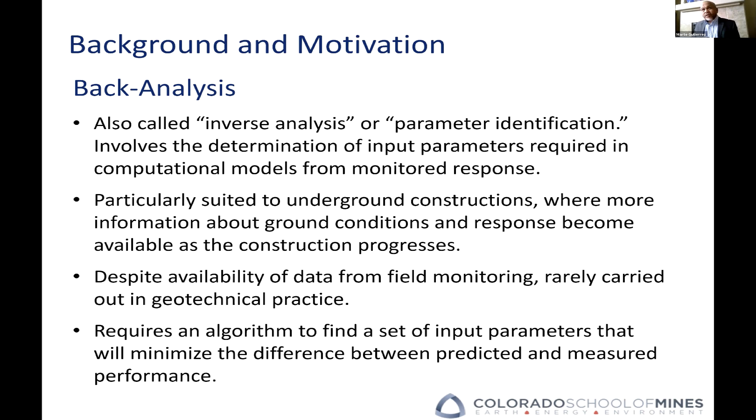Well, the challenge for back analysis is to develop an algorithm to find a set of input parameters that will minimize the difference between predicted and measured response. So we need to be able to match the numerical predictions, computational predictions with field performance by adjusting the input parameters.

Let me differentiate between forward and back analysis. In forward analysis, we have a set of input parameters. We do then our forward computational model, which is what we usually and typically do. And then using the computational model, we predict a response. And most of the time, that's it. We have a prediction, and we hope that it's the correct prediction. Most of the time, however, the predicted response does not correspond or does not agree with the field measurements. And that is where back analysis comes from.

In back analysis, we have the reverse, we have the observed response, and we have to develop an inverse computational model to try to determine what are the input parameters that will match the observed response. The most rigorous approach to do back analysis is by the so-called gradient methods. That is, we try to get the slope of the response at a certain time.

And we use the slope to move forward and to make an improvement on the predicted parameters. So if pk are the set of parameters, or the vectors of parameters, delta pk is the change within an iterative step to try to improve the prediction, and pk plus 1 is the improved set. We could do this by the so-called sensitivity matrix A, and we have to get the inverse of that.

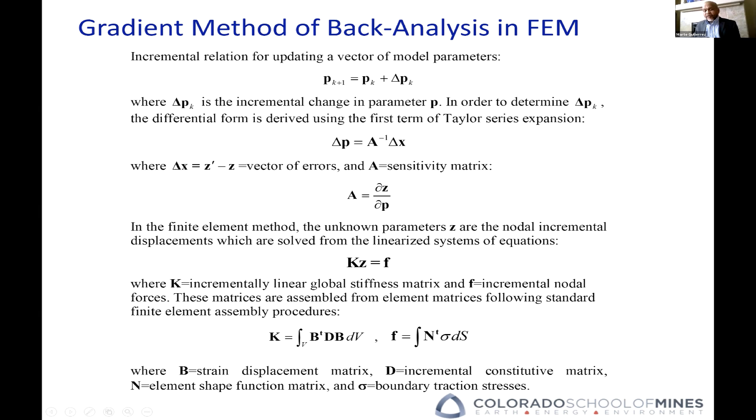The challenge is to find the so-called sensitivity matrix. A is defined as the inverse of K and the derivative of K with respect to p times z, which is our displacement vectors in this case. This is very difficult to derive most of the time to establish this sensitivity matrix. But even if we could, there are many issues with the so-called gradient methods.

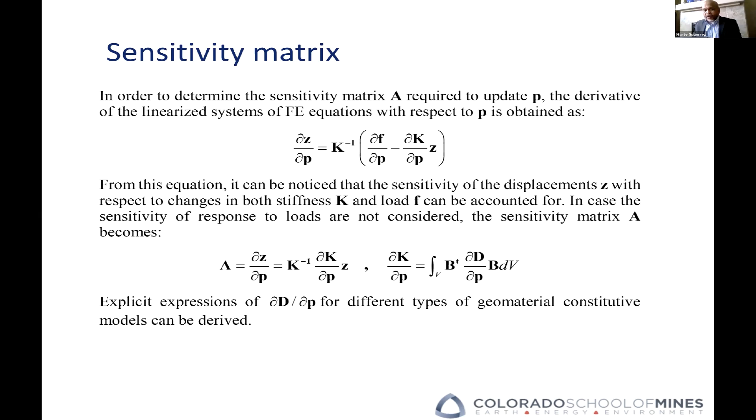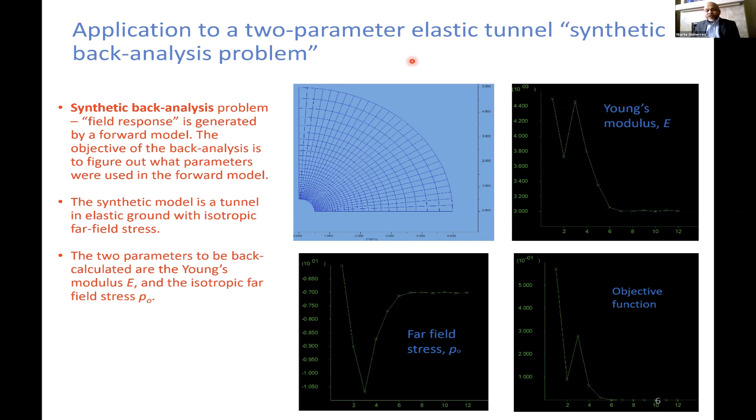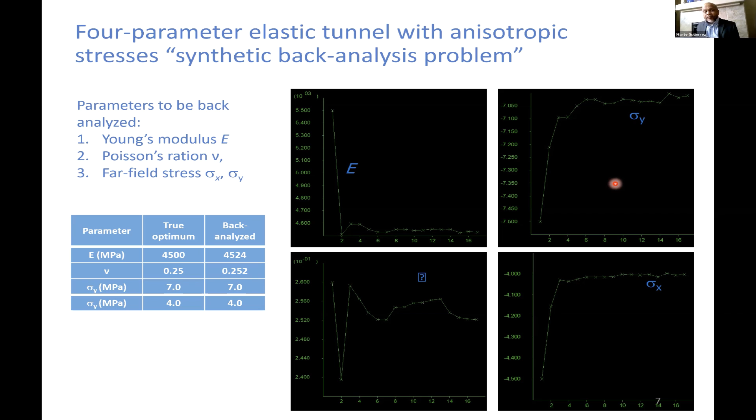The moment you have more than two parameters, in this case, we have 4 parameters: the Young's modulus, Poisson's ratio, and the far-field stresses, and we now have anisotropic stresses. You can see that the trend towards the final parameter is no longer simply monotonic. There's some cycles, it goes up and down. It really struggles to get to the true solution. And more or less, the only reason this method works is that we combine the gradient method with some search. We try to search for the parameter at the same time. So on paper, it's very good.

And when we were doing a study of this, we found out that almost all papers that use the gradient methods that you find in the literature only use as an example 2 parameters to back analyze and an elastic problem. And we found it to be odd. Why is it everybody's doing only two parameter elastic problems? It turns out that this only works for those cases. If you have nonlinear problems, it doesn't work. If you have more than two parameters, it barely is functioning. So in theory it is very good, but in practice, it doesn't work.

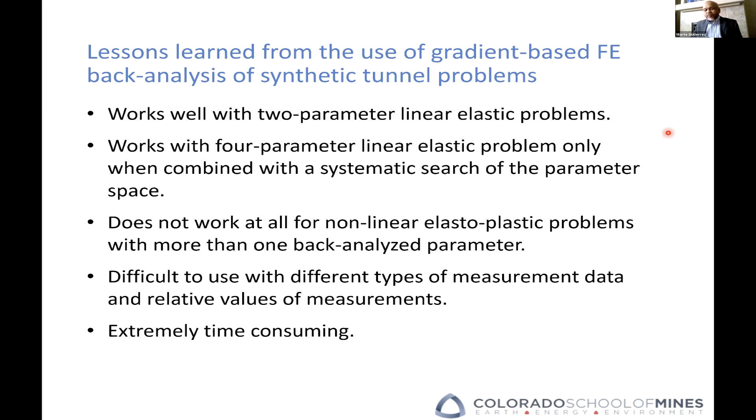So an alternative to so-called gradient methods is the so-called heuristic back analysis. This is nothing more than doing a search. You have vectors of the different parameters that are involved. You try to get the minimum and the maximum, and you discretize the space between the minimum and the maximum of the different parameters, and you try to do a search of which of those combinations of parameters will provide you with the best estimate. It's nothing more than a search procedure. You still solve the problem directly using a forward model. As in forward modeling, you just try different sets of parameters until finally you succeed.

How to carry out those searches is a challenge. And then here we could use the so-called heuristic methods. Heuristic methods are experience-based for problem solving, learning, and discovery. We do not guarantee the solution to be very rigorously optimal, but the set of parameters are good enough. It uses search trees, okay? So instead of generating possible solution paths, it looks at branches that are more likely to produce outcomes, and those are the ones that are selected. It's an iterative search.

It searches on the different parameters and it follows paths and avoids unnecessary paths by assessing how close the current iteration is to the solution. It's a viable technique for difficult optimization problems. This back analysis is really an optimization problem, or least square optimization problem, where you try to minimize the difference between prediction and measurements. And it exploits randomness in the system to try to get to the solution. Examples are neural networks, simulated annealing, genetic algorithms, and evolutionary algorithms.

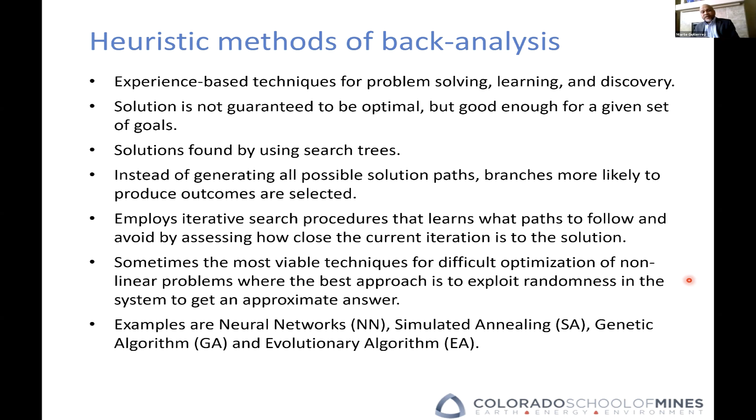Here we develop two methods. One is simulated annealing. I'm not going to give you the mathematical details, but the simulated annealing process follows a physical process, which is how we create a metal with very good properties. It simulates the annealing process of metals: how we come up with a very optimal atomic structure of a cooled steel, for example, or other metals.

So it uses a so-called cooling procedure until we arrive at a theoretically perfect crystalline structure in the material. It minimizes the number of imperfections and dislocations. And then during the cooling, it follows its own optimization path. So we have a program that uses the temperature. The temperature here is nothing more than a fictitious parameter to try to order the search and then allow the search to converge into the best solution.

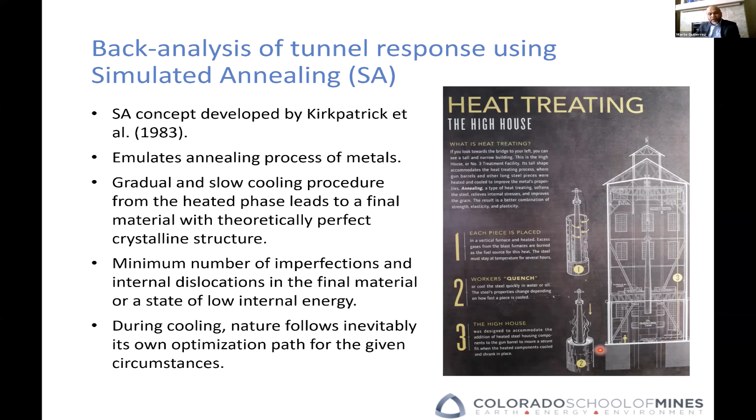This is a problem of a shallow tunnel. We only model half because it's symmetrical. And we have 4 parameters to back analyze: the modulus, ratio of horizontal to vertical stress, the cohesion, and the friction angle. And you see that after a certain number of steps, we arrive at the back calculated parameters that are very, very close to the ones that we used to generate the model.

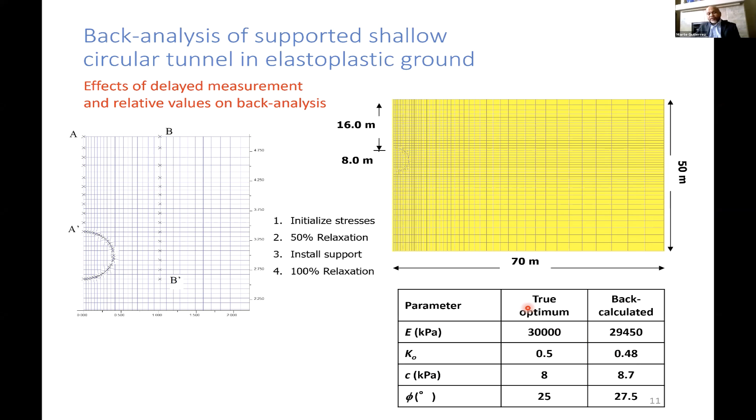And here is how it behaves. These are the 4 parameters that are being searched. As you can see, the elastic modulus tends to oscillate around the true solution, friction angle as well. But this is not how we judge whether the parameter converges. Although the parameters tend to converge between the maximum and the minimum, what determines the convergence is the criterion, the error function, the objective function that we use, and you can see how the objective function, despite all the oscillations, tries to converge to 0 and achieve an optimum.

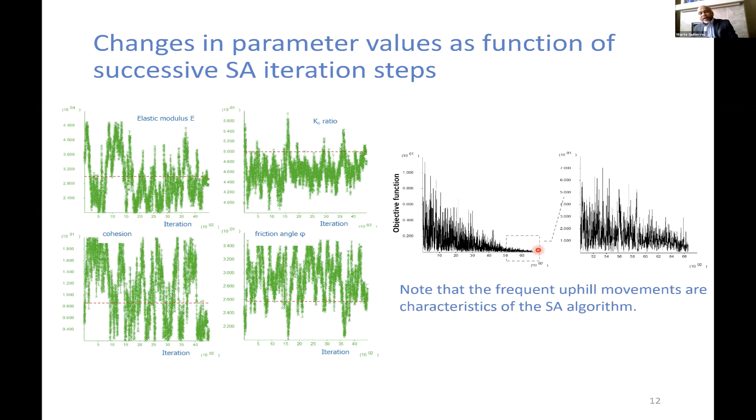The other back analysis procedure that we use is the differential evolution algorithm. This is based on the theory of survival of the fittest that we have in the theory of evolution. The fittest vectors, those that optimize the functions, lend their genes to the offspring. The differential evolution algorithm bypasses the requirement of a binary system in the genetic algorithm and makes it more user-friendly, because the genetic algorithm used to be only for binary systems. Like simulated annealing, these are direct search methods.

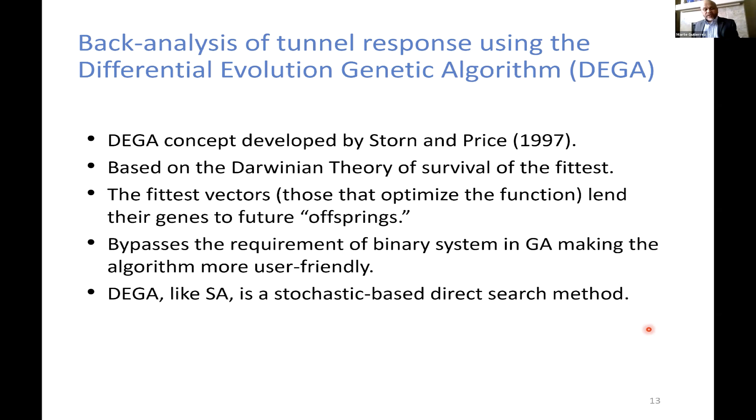And again, the same problem as before. Interestingly here, we installed an MPBX at the top of the tunnel, at different points, and we also have inclinometers, and you can see the predictions between the inclinometer and the history match or back analyzed response are matching very well. So the algorithm works very well in getting the parameters.

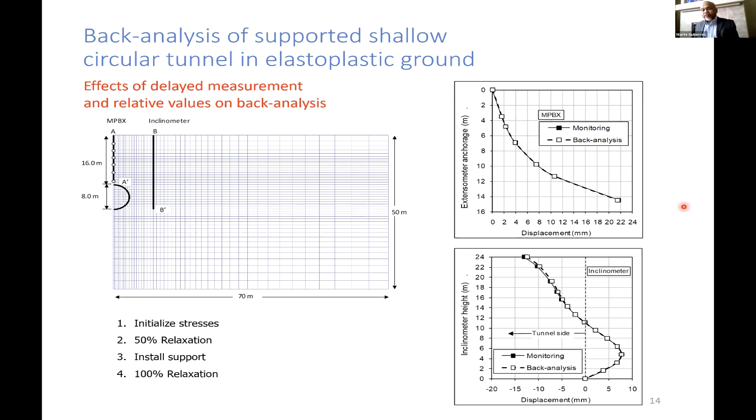This is how it works. First, we start with a random initial distribution of parameters. This is the probability distribution functions of the parameters at the beginning: the Young's modulus, K0, cohesion, and friction angle. So from the most realistic minimum to the most realistic maximum, it could have, for example, a Gaussian distribution or a random distribution. And what the differential evolution genetic algorithm does is to narrow this distribution. You see the distribution getting narrower and narrower to the point that we have gotten the true value. So these are the lessons from these two methods.

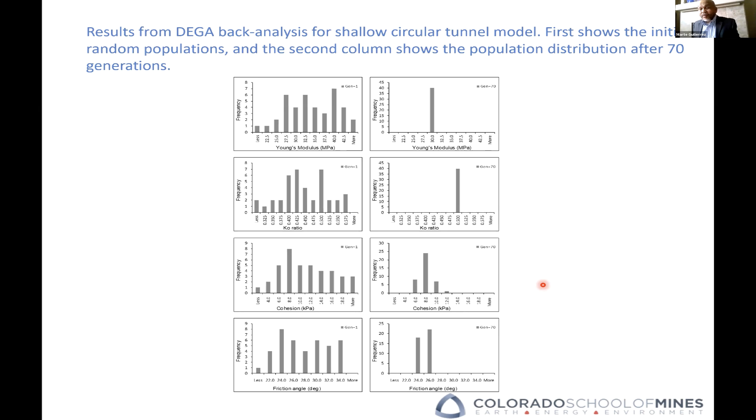By the way, we have implemented this method in FLAC, and there are FISH functions that implement the search process for the back analysis. They're rather involved to program, but they are quite easy to use and quite easy to implement compared to other methods.

The advantage of these methods is they're not greedy. They don't get stuck in a local optimum, like, for example, the gradient method, where you can get stuck in a local optimum which is not the global optimum. They allow for uphill movements. The system can be jolted to get unstuck out of local optima and then continue until it finds the true optimum. You can make independent assumptions on the initial parameters. The overall equation that you're solving need not be continuous.

You don't need the gradient of the response with respect to the parameter. It's independent of convexity status; you can have a very nonlinear problem with very irregular convexity characteristics. You can use it with heterogeneous data, different sets of data. You can mix stress, displacement, strain, loads, boundary loads. You can mix all of this, unlike in the gradient method, where the only variable that you can solve directly is displacement.

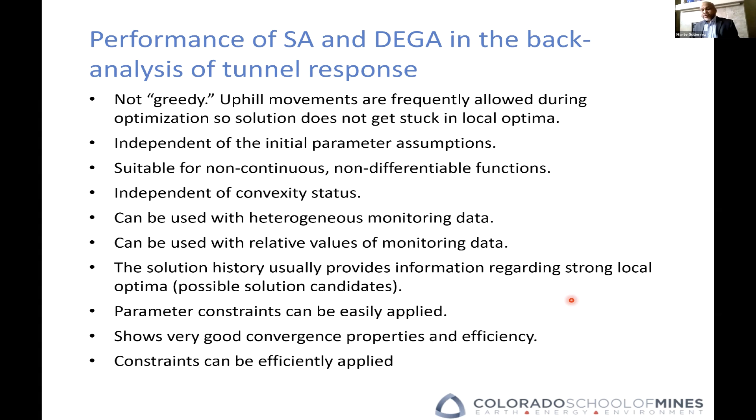We apply this to demonstrate how it works, with the real problem of a tunnel in China. This is a tunnel that's 450 meters long from Fuzhou to the airport. And this is a well-documented case. There are so many instrumentations that have been done: subsidence, MPBX, forces, convergence, etc. So this is the geology. So we try to apply the back analysis on this section.

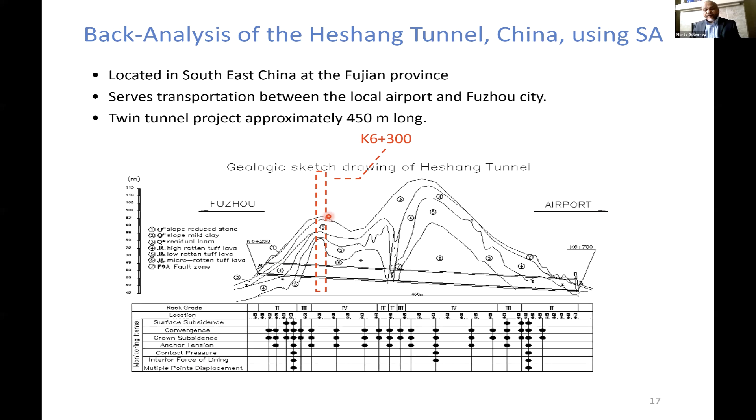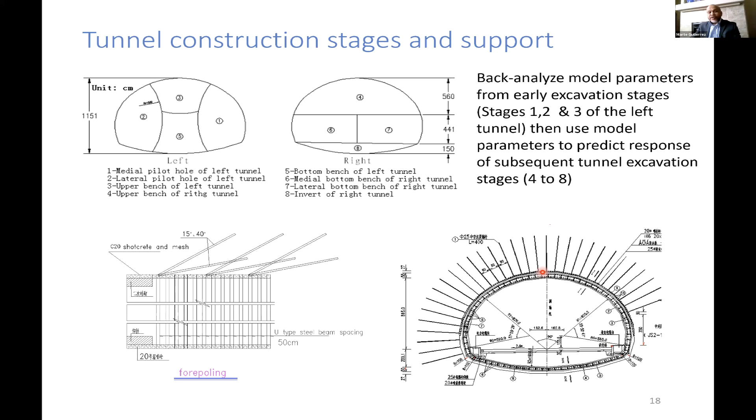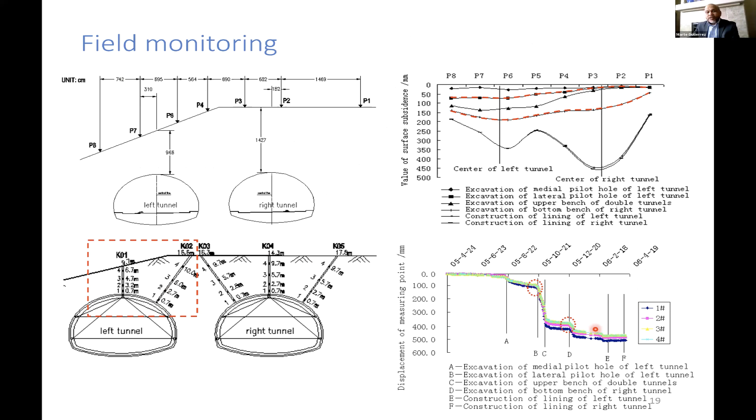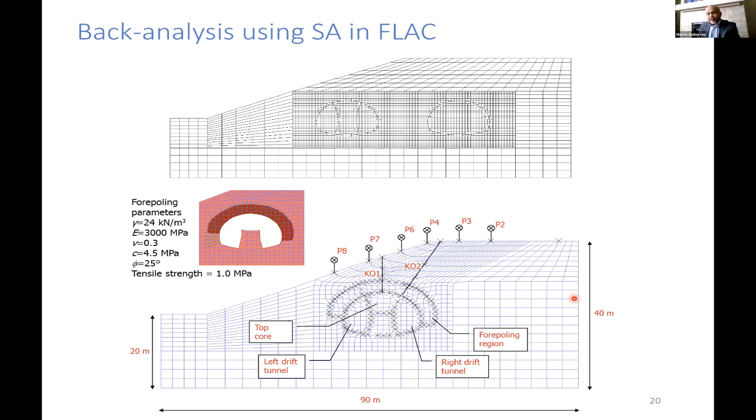This is the FLAC model of the problem. We have a refined mesh close to the tunnel and a very coarse mesh around the tunnel. Those are the different excavation stages. We model the forepoling with an equivalent continuum. We homogenize the forepoling and the rock around it. Okay, here are the different grids, the different excavation stages and the different instrumentations.

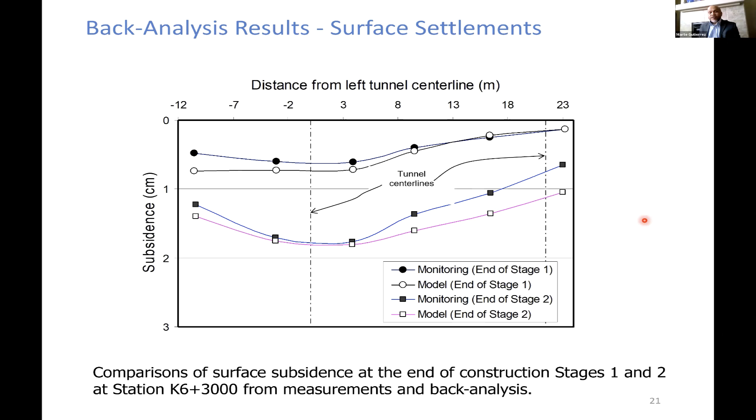We match 2 instrumentations: the subsidence and the measurements at the MPBX, and we are able to match. For the left tunnel, the subsidence, both the left and the right tunnel. I'll talk about how we carry out the left and the right differently. These are the center lines. And you see a good match between the predicted and the measured subsidence. This is the back analysis of the MPBX displacements along the MPBXs on the left tunnel, and you can see a very good match.

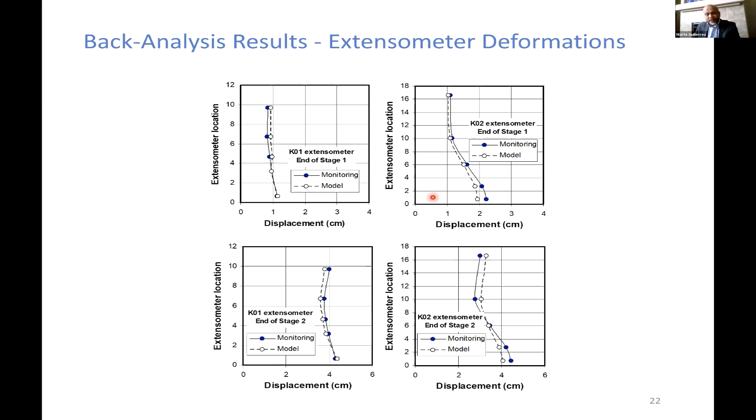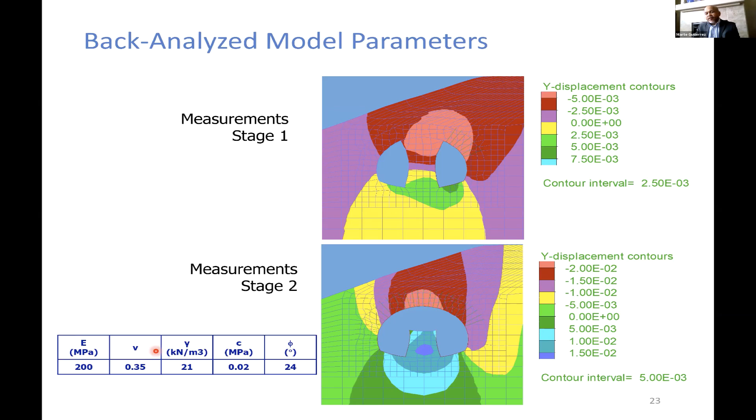This is again the back analysis responses. We were then able to arrive at this set of parameters through back analysis. Now, using these parameters, we then predicted the response of the left and the right tunnel after the right tunnel has been excavated, because the left tunnel will also respond due to the excavation of the right tunnel. And you can see that there's a good match. This is now forward modeling, okay?

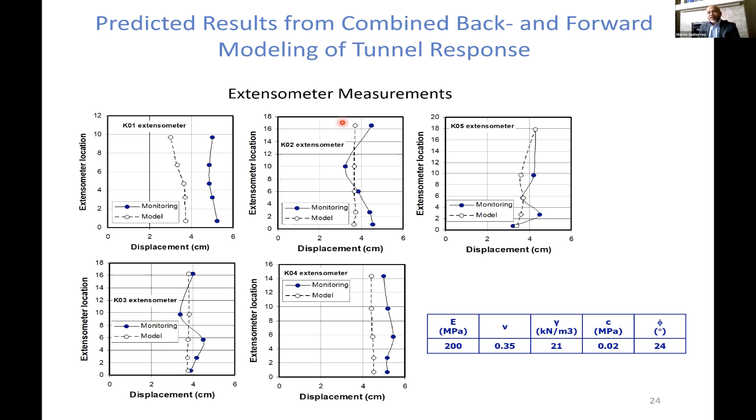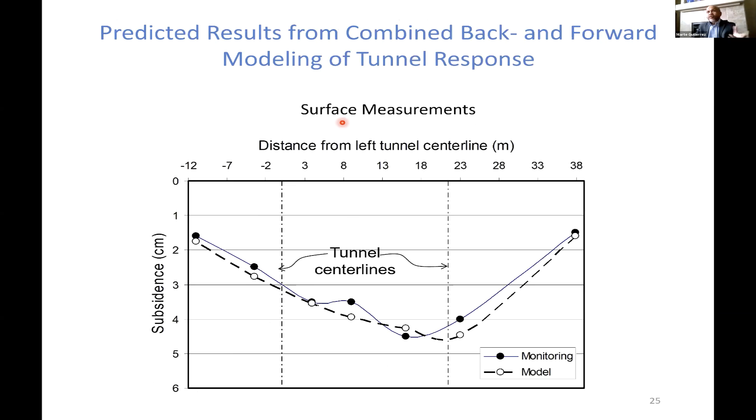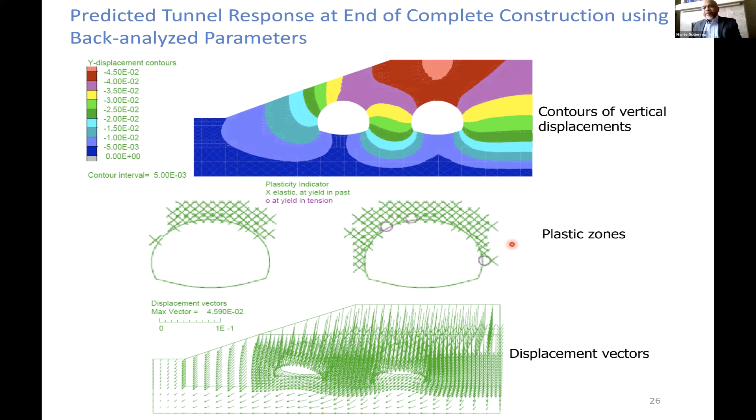So in conclusion, gradient-based back analysis methods look good in theory. Theoretically, they're very good, but they're actually difficult to use in practice. Like Yogi Berra said, in theory, there's no difference between theory and practice. In practice, there is. So when you apply all these theoretical things in practice, they don't actually work. So be careful. On the other hand, heuristic methods are found to be very viable techniques in the back analysis of tunnel response, because they have very good characteristics.

They're not greedy. They can unstick themselves out of a local optima, independent of initial variables. They're suitable for non-continuous, non-differentiable, non-convex problems. They can be used with heterogeneous measuring data, that is, you mix displacements, stresses, loads, etc. You can have relative values, that is, relative displacements between two points, for example, and you can constrain the parameters if you want.

One thing we have to remember is that when we do back analysis, we need to account for errors and delays in measurements, and those are typically difficult to account for. Back analysis remains a very challenging problem, but once we develop it and it becomes a really viable tool, I think the industry could benefit a lot from using back analysis.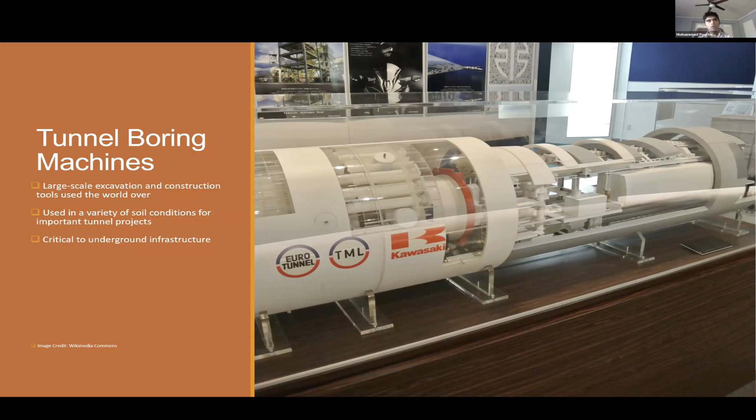I'll get into more details on their operation in a minute, but let's take a moment to see the consequences of their widespread use and popularity. Because they're used all over the world, they're also used in a variety of soil conditions. Therefore, they have to be adaptable to different environments, and any tools or systems developed for them should ideally also be applicable in a wide variety of environments. Developing tools and systems to aid TBM excavation and construction is also a high importance research area, simply because of how integral TBMs are to underground infrastructure. So let me get into a little bit more detail on the nature of TBM operation.

The TBM is composed of a shield or tunnel support mechanism and systems for excavation and construction. The whole idea is the TBM will drill forward using the cutter head, and every few meters it'll place a precast concrete tunnel segment, thus combining the excavation and construction phases. This is a rather effective and efficient method, which contributes to their popularity.

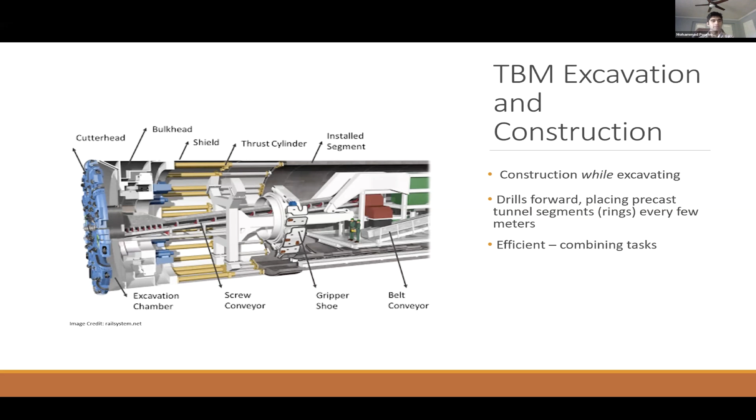Now, just looking at this diagram, you may notice a slight issue, which was mentioned earlier. The operators of the machine cannot see past the cutter head, or, for that matter, around the TBM. This blindness tends to be an issue, and that's the problem we're trying to solve here.

While TBMs are generally well optimized for their task, they aren't running at maximum effectiveness so long as they're running blind. They lack contextual information on their environment, and with that information, they would be able to be run more efficiently. There has been past research on this problem as it's an acknowledged issue. So let's take a look at some of the previous work done in this field to try and resolve the issue.

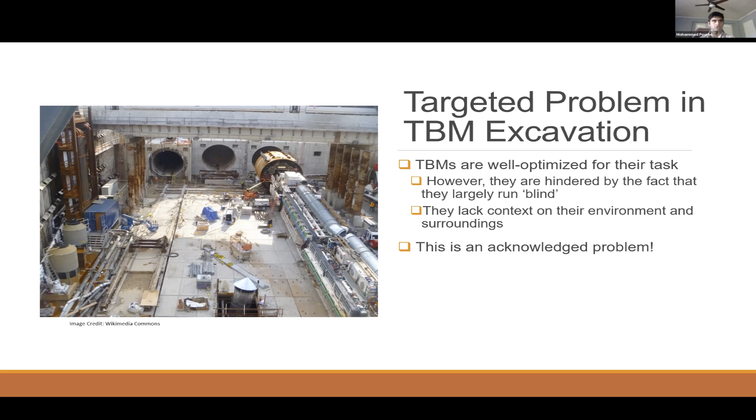Now, while the solution does have merit, it is rather expensive and does not fit into the existing infrastructure. It would require an actual modification to existing TBMs, rather than working within the system we already have.

Now, there have been attempts to work within this existing framework by using the data that's already being generated by TBM sensors and mechanical data to try and predict how the TBM will operate, predicting its rate of advance, predicting how the TBM will react to the oncoming soil, prescribing parameters for the operator to set, and other important features that the operator needs to have knowledge on. And some other systems even try and predict the actual soil composition given TBM response or past soil conditions.

Now, the thing is, these solutions have generally been implemented with more traditional statistical techniques. So while they have met with success, they tend to be limited in their adaptability or scope. For example, some solutions inherently are limited to working only in specific environments which are ideal for the setup. They aren't generalized to adapt based on input type.

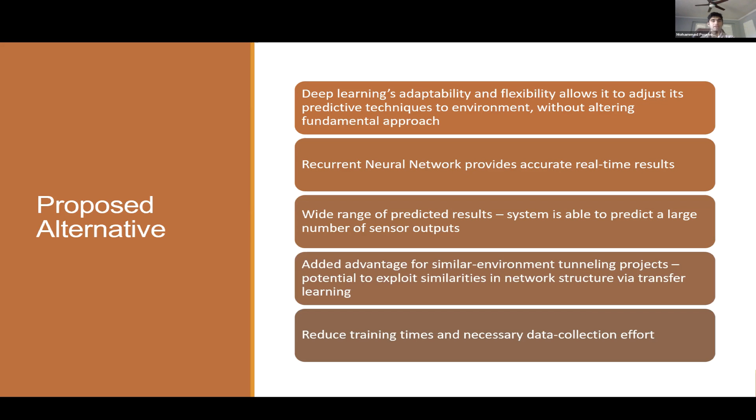But what if two worksites were similar in their composition, say in a parallel tunneling project? Then we could transfer the learning that the system has done in one worksite to the other. That's part of the problem we tried to address here and something that we did test here. I'll go into further depth on the outcomes and the nature of this transference of learning in a bit.

The data we're using in this project was provided courtesy of the LA Metro. A big thanks to them for providing the dataset. The data is from the new LA Metro Gold Line connector, a pair of 1.9-mile tunnels running in parallel. The project is budgeted at $1.7 billion and it's forecasted to be available for public use in 2022.

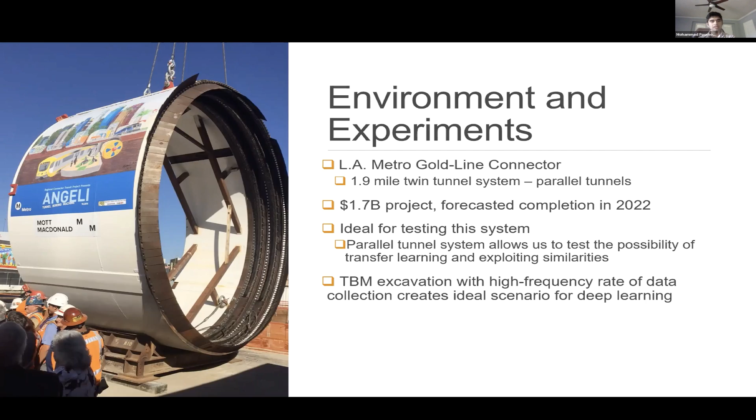This dataset is fortunately quite good for testing our proposed solutions. The data is collected at quite a high frequency, meaning that we can train our network on a rich corpus of information. The parallel tunnel system also allows us to test the aforementioned possibility of transferring learning from one tunnel to the other. Now, let's get into the actual details of this, the structure of the network, how the system is working, how we're formatting and cleaning the data, and most importantly, the results. I'll start with a look at our chosen system, the neural network.

All right, so in a neural network, which is the machine learning system we're using, we essentially have a vast number of neurons or decision units working together. Each neuron receives a set of inputs, operates on them based on its weight, and gives some results. These results are fed to other neurons via these connections, and ultimately, all of the different decisions come together to produce some output. To train the model, we give it an example input, let it run all its operations, take the output and compare it with the label or truth for that example. Then, using the gradient vector with respect to all of the weights of the neurons composing the decision, we propagate back the proposed change given by the gradient to minimize that error.

Now, the details here aren't of quite such relevance, but what I want to make clear here is the importance of setting up the data and label associations so that the model can learn to connect the data and the proposed label. What I also want to make clear is the nature of the training, the stored weights on the neurons. Those two things together will be very important in understanding the nature of the transfer learning that we're trying to use here.

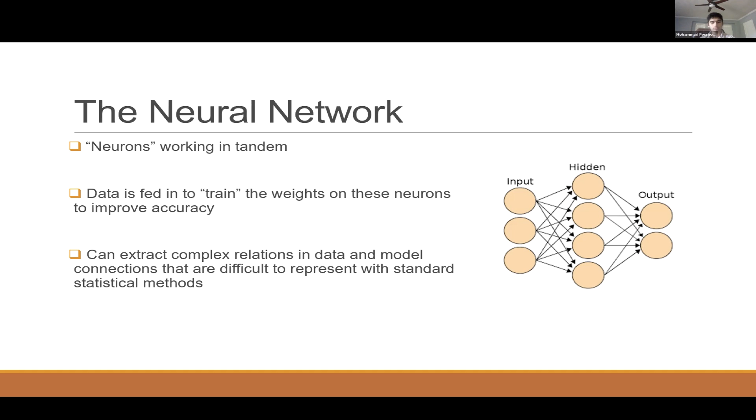You see how this might be useful in a tunneling application where the previous sensor outputs are certainly extremely relevant and can be used to predict future sensor outputs. In this manner, we give it the past 3, 4 time steps and allow it to predict the next time step. Because the future is determined by the past here, we're able to give it previous inputs, previous sensor readings, and have the output be the future sensor readings.

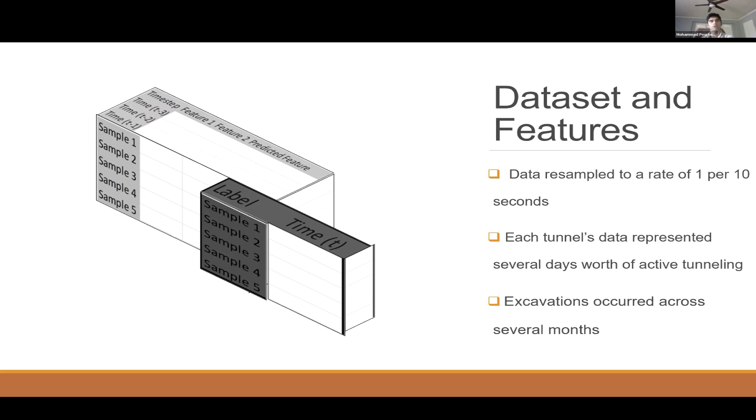I mentioned earlier that we had the data for parallel tunnel systems, 2 tunnels. Each tunnel's data represented several days worth of active tunneling time, and the total excavation time would be across several months. Now, on to the results.

Now, let's consider the point I brought up earlier, the possibility of transfer learning. Earlier, I described the system wherein the network weights are adjusted by feeding the network various training samples. The theory here is that if we were to train the network on data from one tunnel in certain geological conditions, then those weights can be reapplied to another tunnel in similar geological conditions. Here's what the results look like.

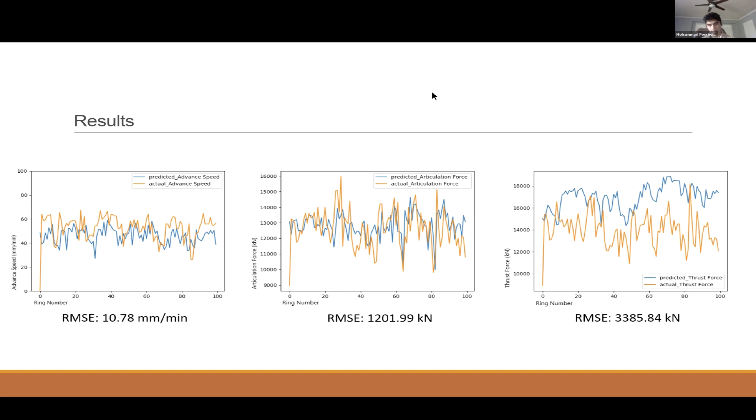All right, our next speaker is Dr. Tamir Epel, who has recently completed his PhD in Civil and Environmental Engineering at the Colorado School of Mines. Tamir has joined Mott MacDonald in California as a tunnel engineer, and before starting his graduate studies in the US, he worked for 3 years as a tunnel designer in Israel, and he took part in the design of Road 6, sections 3 and 7 tunnels, and also led the design of several smaller tunneling projects. So with that, Dr. Epel, please go ahead and share your presentation.

Thank you, Reza. All right. Okay.

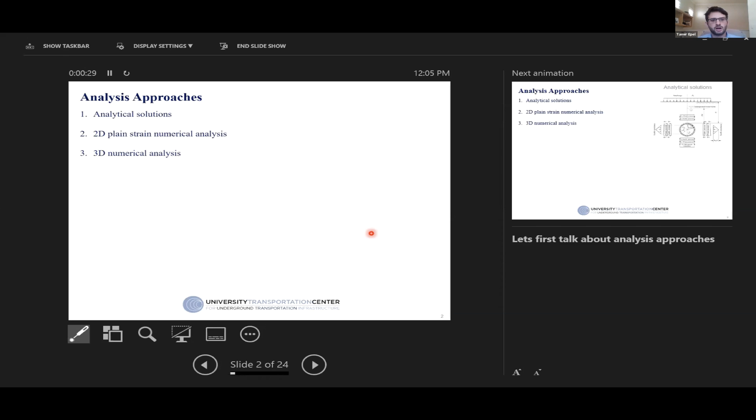So, thank you, Reza. I'll be presenting today on the examination of segmental lining loading for soft ground tunnels, design approaches versus actual behavior. This was part of my PhD research with my advisors, Dr. Mooney and Dr. Gutierrez, who spoke earlier. And we'll start off talking about the analysis approaches used in tunnel design.

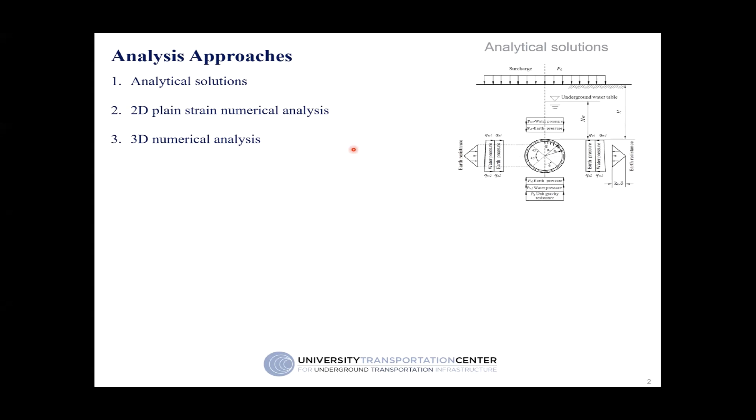So in tunnel design, we have several analysis approaches. First of all are the analytical solutions that are used for preliminary design, and also for checking and validating the results we get from 2D plane strain analysis and 3D numerical analysis. We'll find 2D in almost every project, and 3D in the more complex projects.

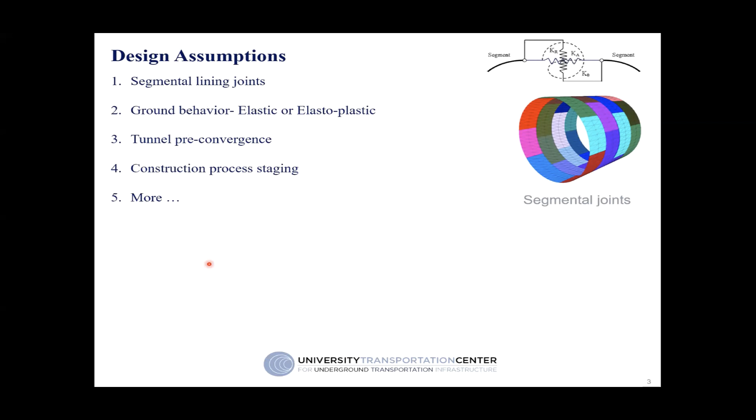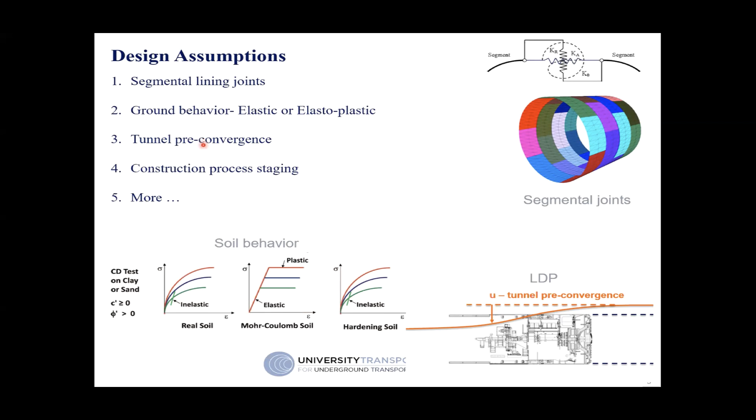And as I mentioned earlier, we have several design assumptions that we commonly use. First of all, segmental lining joints, ground behavior, elastoplastic, tunnel preconvergence, and construction process staging. In this study, we'll concentrate mostly on tunnel preconvergence and construction process staging.

So, tunnel preconvergence is usually addressed in analytical and 2D numerical solutions, where tunnel preconvergence is the deformations that occur as the tunnel progresses. So in 2D analysis, we can only model the 2D cross section. However, in real tunneling, we do have the 3D effects of the distance from the face.

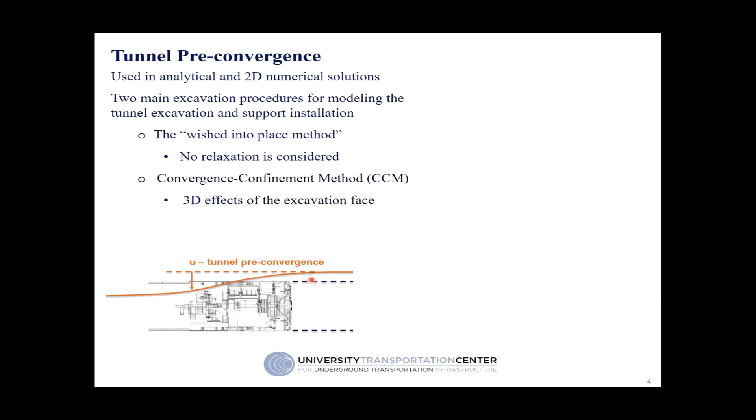Farther ahead of the face, we have very little displacements and no displacements. And far behind the face, we have the maximum displacements. And somewhere in between, we install the lining. Where we install the lining, the more convergence that occurs, the lower the lining loads are, and the smaller the convergence that occurs, the higher the lining loads are.

You can categorize this by two main approaches. The first is the wished into place method, where we assume no relaxation, no pre-convergence at all. So we're basically installing the lining far ahead of the face, and the full magnitude of loads is taken by the lining.

And in the convergence confinement method, we know the distance from the face where the lining is installed. We can calculate by LDPs the deformation that occurs at that distance, and relating that to the ground reaction curve, knowing the displacement that occurs, we can calculate the lining loads.

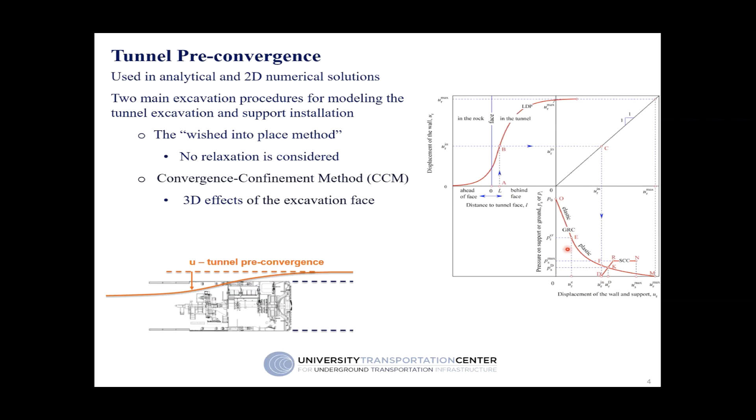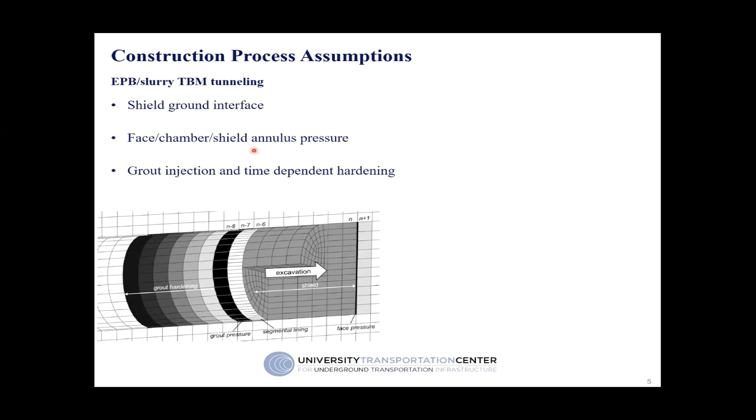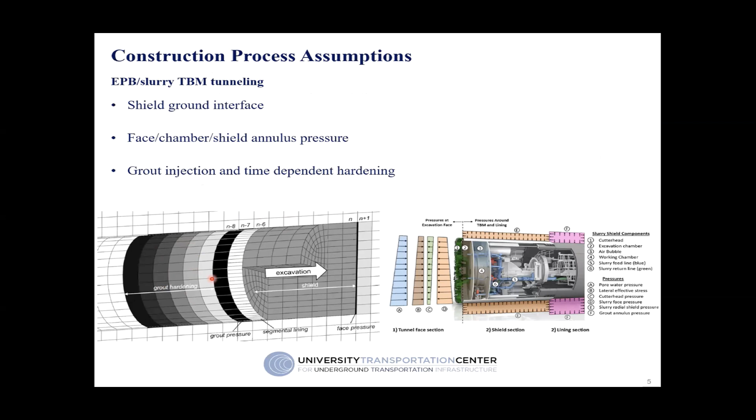So the second assumption is about construction process assumptions. Talking about pressurized tunneling, EPB and slurry TBM tunneling, the main factors are the shield ground interface, face, chamber, shield, annulus pressures, and grout injection and time-dependent hardening of the grout, and pressurization of the grout material itself.

So to look into these design aspects, we looked into the Northgate Link project in Seattle, where 5.6 kilometers of twin bore tunnels were excavated with 23 cross passages, and with these main characteristics of the main tunnels, and most importantly the 10 centimeter gap between the shield and the excavation.

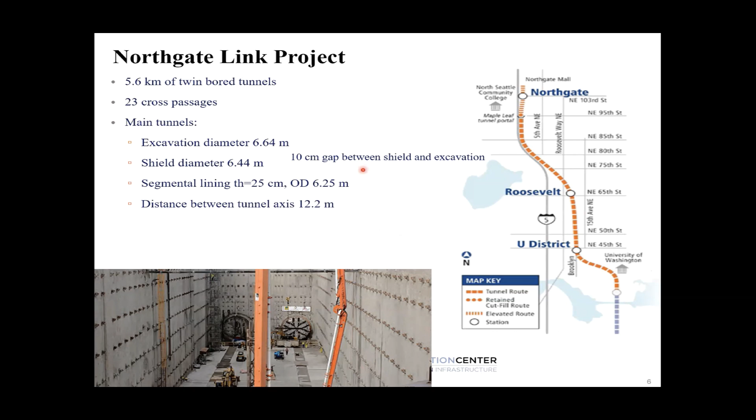The geology the project was excavated through is complex and highly variable interlaid glacial deposits, where in this cross section that we'll discuss in this study, the tunnels were excavated through cohesionless sand and gravel. And most importantly, what we're taking from this project is the instrumentation and monitoring of the strain gauges in the segmental lining, where segmental lining strain gauges were installed in 17 cross passage locations.

Here in this presentation, we'll talk about one cross section where 2 rings were instrumented. The rings were located at the second tunnel, so in the first tunnel that was excavated, no instrumentation was installed, only in the second tunnel.

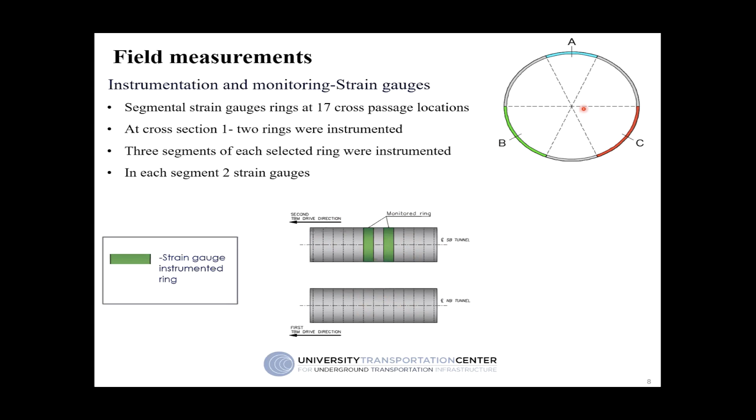And in each ring, 3 segments were instrumented, as you see here, with only the orientation of the segments changing according to the ring build. And in each segment, 2 strain gauges were installed, one in the intrados and one in the extrados, allowing us to analyze both thrust forces and bending moments.

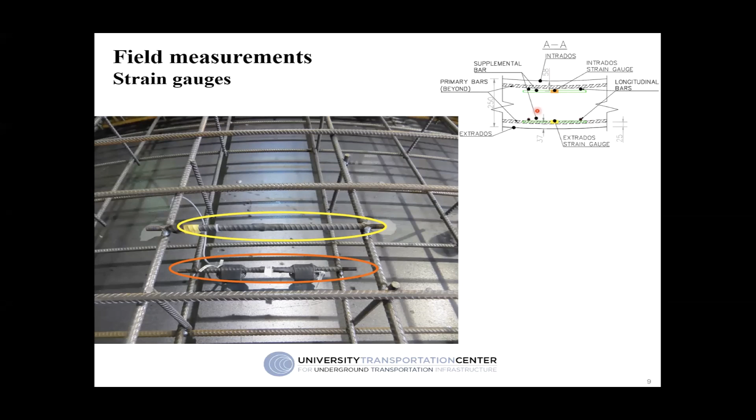So to study these assumptions with the field data that we have available, the first study included 2D numerical analysis using FLAC 3D, where the lining was modeled by liner elements with direct behavior of the joints using rotational stiffness and time-dependent grout stiffness. The ground was modeled using the hardening soil model.

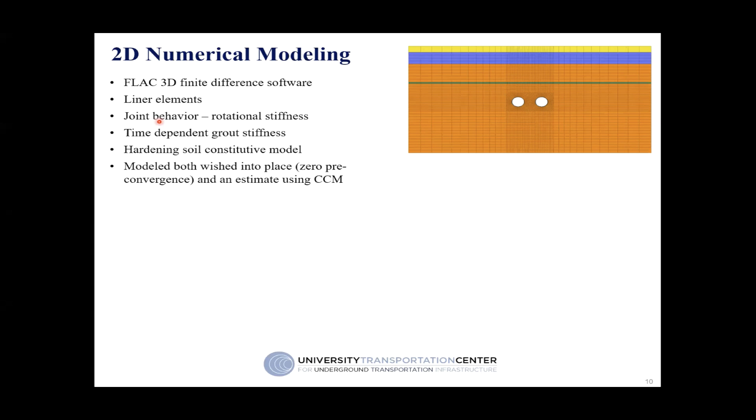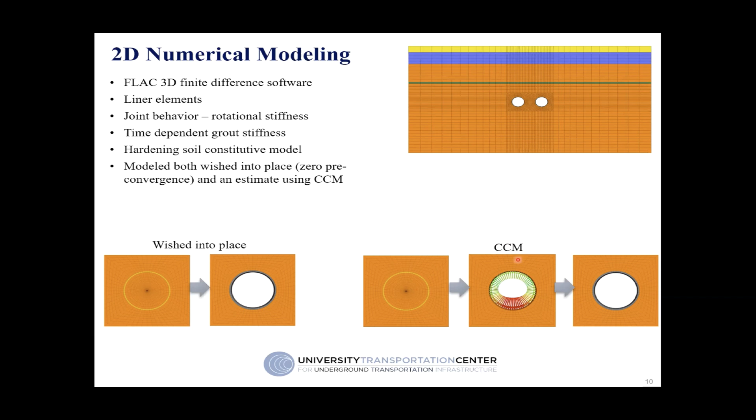And the two assumptions that were studied in this part of the research were the wished-into-place assumption and the convergence confinement method, allowing for pre-convergence. So with the wished-into-place assumption, after undisturbed conditions, we remove the tunnel material and install the lining. In the convergence confinement method, after undisturbed conditions, we remove the material, apply a radial stress, allowing for pre-convergence according to the convergence confinement calculations, and only then install the lining.

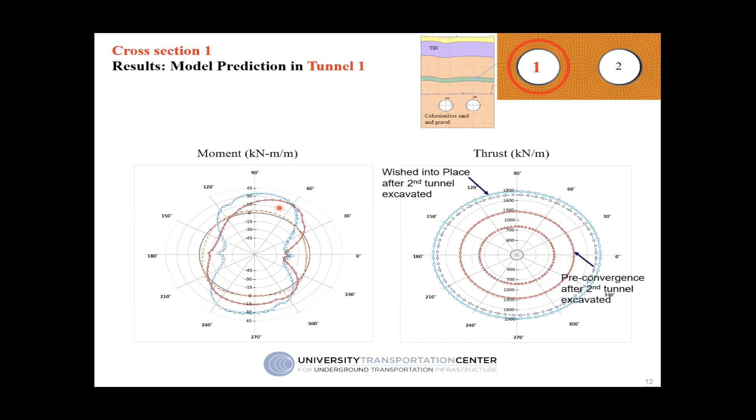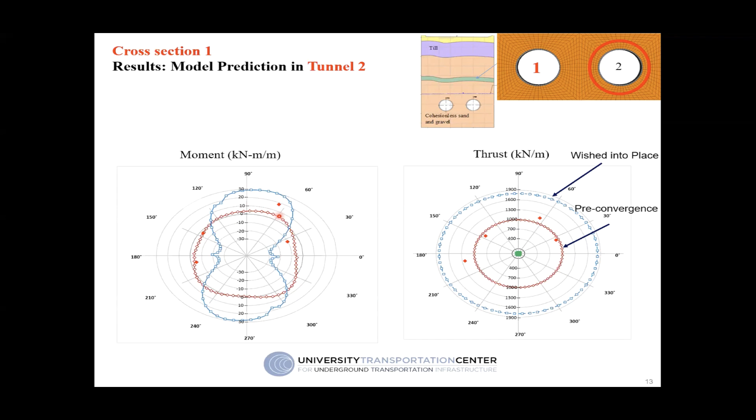So now let's look at the second tunnel that was excavated, the lining loads in the second tunnel, where we do have the instrumentation results, the field measurements, that are seen here by these red points. And we see a much better prediction by the pre-convergence method compared to the wished-into-place method, which overestimates the thrust force quite significantly. In the bending moment, this is also seen. However, there are some higher bending moments compared to the pre-convergence prediction.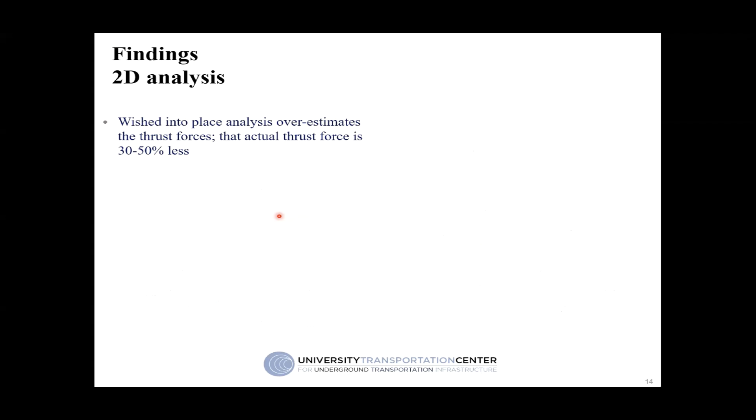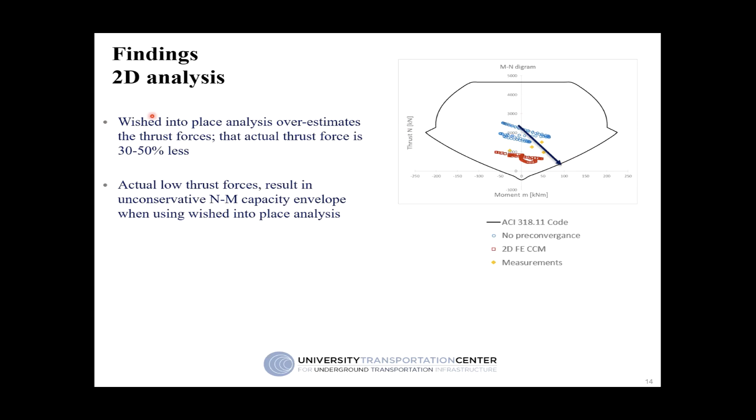So this brings us to the findings, where the wished-into-place analysis overestimates the thrust force, in that the actual thrust force is about 30 to 50% less than the wished-into-place prediction. The actual low thrust force results in an unconservative bending moment–normal force capacity envelope when using the wished-into-place analysis. It brings us up here, while the real results are closer to the envelope itself, with higher bending moments and lower thrust forces. So it is important to have in mind that despite perceiving the wished-into-place method as more conservative because its results are higher, in this concrete design aspect it is deceiving.

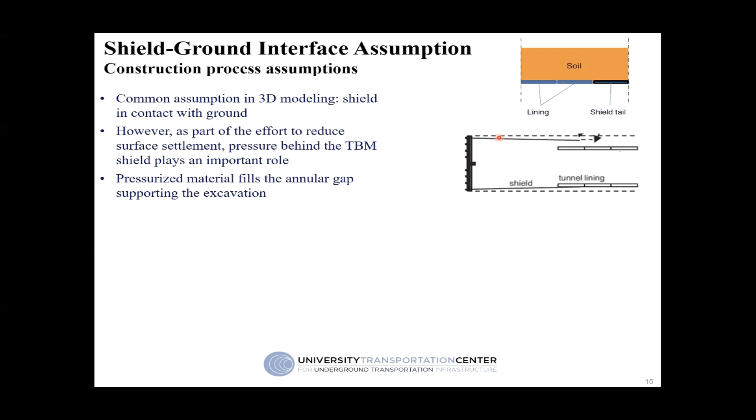So now let's move on to the construction process assumptions, looking at the shield-ground interface assumptions. A common assumption in 3D modeling is that the shield is in full contact with the ground. The TBM excavates, and the excavation diameter is slightly larger than the TBM shield, as I discussed earlier. In most projects, it's about 2-3 centimeters. In the Northgate Link project, as I mentioned, this is larger. And in the past, it was assumed that the ground converges onto the shield and is in full contact with the shield.

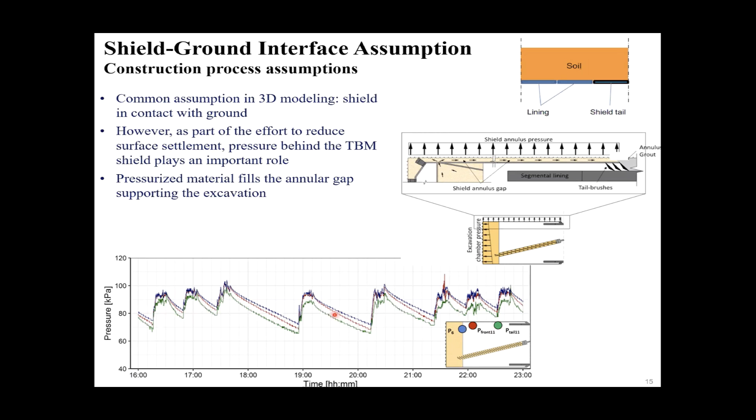However, as part of the effort to reduce surface settlement, pressure behind the TBM shield plays a more important role. The pressurized material from the chamber fills the annular gap and supports the excavation boundary, as it's pressurized also behind the shield. We can see this for the Northgate Link project. Here in the bottom figure, in blue is the chamber pressure measured at the top, and in red and green are the shield annulus pressures. Red is the front shield, green is the back shield, and this connectivity between all the measurements shows us the pressure supporting the excavation boundary.

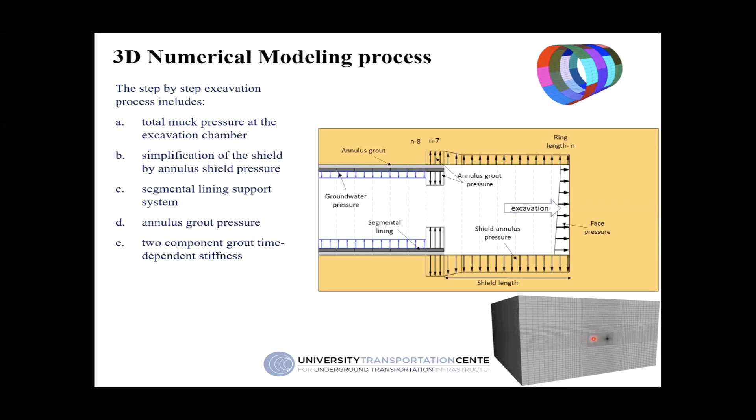So with this, the main innovation in the FLAC 3D model developed for this part of the research is the simplification of the shield by annular shield pressure. As you see here, in addition to modeling the face pressure, we also model the annulus shield pressure instead of modeling the physical shield itself, incorporating also more complex structural time-dependent behaviors of the TBM construction process itself, including the annulus grout pressure, segmental lining, the joints themselves, two-component grout time-dependent behavior, and so forth. This process is done both for the first tunnel on the left and the second tunnel on the right.

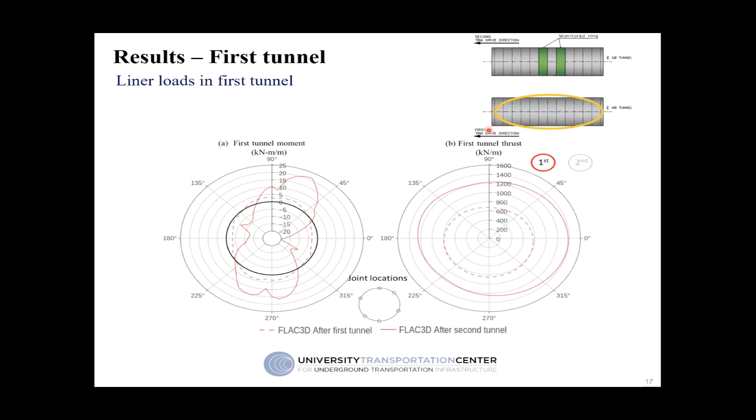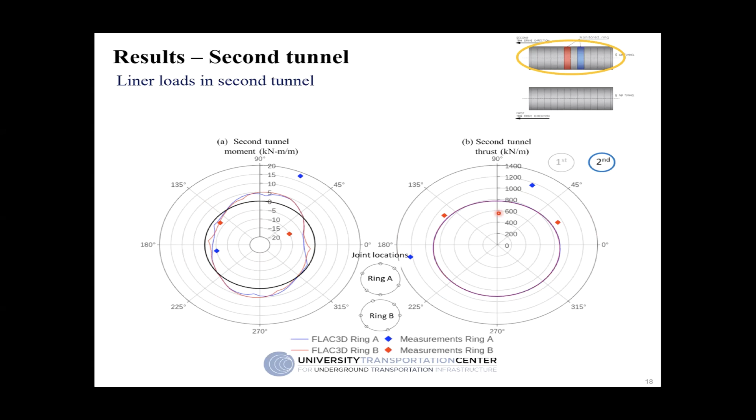However, ring A is significantly underestimated by the numerical model, as the field measurements are about 30% higher than ring B, and also a bit more than the predicted values. And for the bending moments, we see quite a good prediction by the numerical model, as we saw earlier as well. This significant difference between ring A and ring B brought us to look into the TBM pressures themselves, the measurements of the TBM pressures as the excavation was conducted.

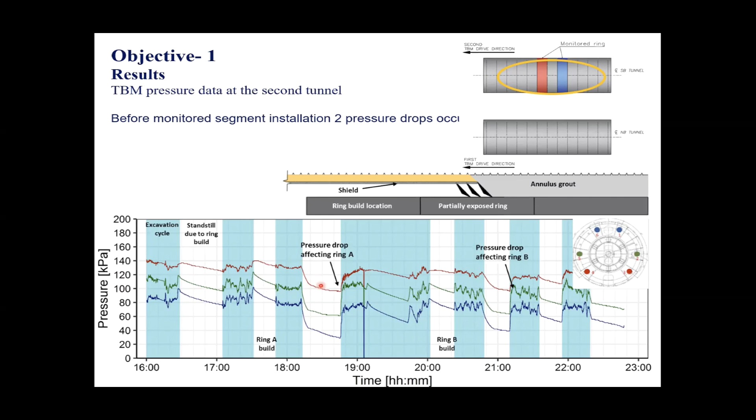And you can see here on the bottom, the darker areas are the excavation cycles, and the white areas are the standstill due to ring build, where after ring A comes out of the shield, we see a significant pressure drop that occurred in the chamber. And this also occurred after ring B came out of the shield. So these pressure drops were also incorporated in the 3D model, where after ring A came out of the shield and was installed, the pressure dropped.

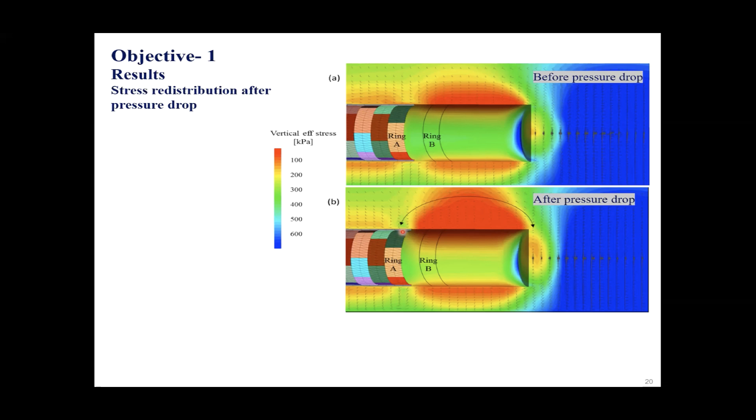So here we see the vertical effective stresses on the top before the pressure drop, and here after the pressure drop, where the vertical effective stresses illustrate the radial stresses around the tunnel. And what we see is after the pressure drop, we have a decrease in the radial pressures around the shield itself. And this pressure redistributes to the first ring that's installed, increasing the radial stress around the ring and increasing the thrust force taken by this ring, as you see here by the blue line.

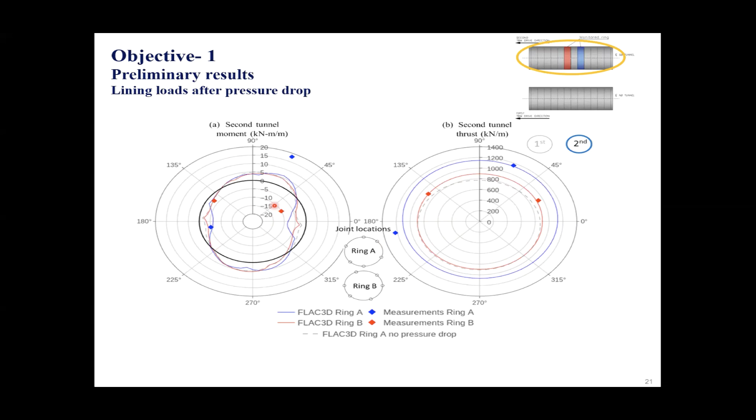That is the prediction by the 3D numerical model incorporating the pressure drop. And we see a very good prediction of that. And the prediction of ring B also matches the field measurements very well. And we see very little influence on the bending moments.

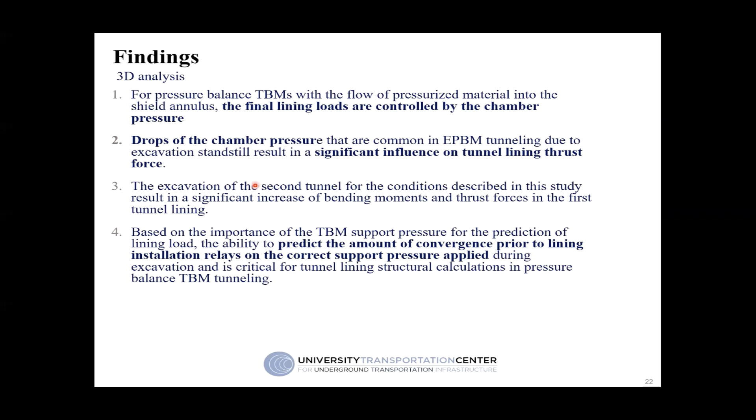So the main conclusion from this part of the research is the importance of the shield annulus pressure on lining loads, shown here by the influence of the pressure drops on the lining loads. And while we usually think of the shield annulus pressure as used to reduce surface settlements, we see here also its influence on the lining loads, which is also important to incorporate and use in predictions as well. And this was also the basis for the next part of this research that I won't present here today, on how important using these pressures is to predict lining loads, to calculate longitudinal displacements, and so forth.